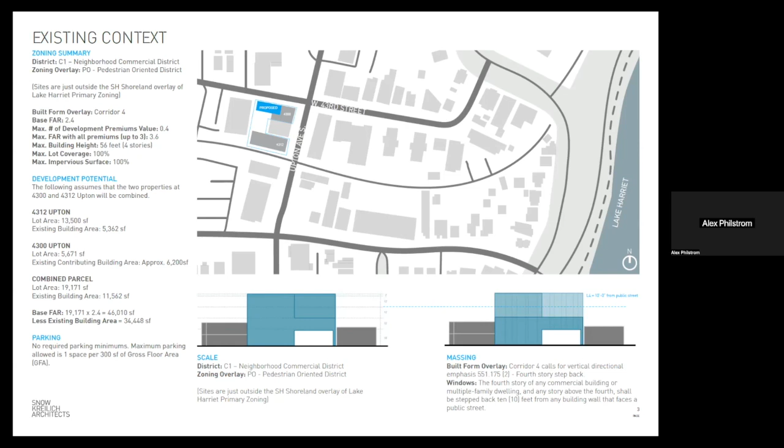Oh, absolutely, sure. Katie, do you have the image that shows the corner existing building and then the Zumbro section? Yes. Yeah. Here we go. Right there, that B photo is, I think, the easiest way to kind of look at that. If that could be enlarged in any way, Katie. But as a background, my name is John Gross, and I'm a developer, and I'm also in hospitality. I have co-founded many, many restaurants and own those buildings along with my business partner, Tony Johannes.

And we're both longtime residents of the neighborhood. Tony now lives in the North Loop, but he was born and raised in Linden Hills, and I've been in Linden Hills for 30 years. But in terms of anything significant, it's been the kind of adaptive reuse projects we've done in Linden Hills. So just as giving the context here,

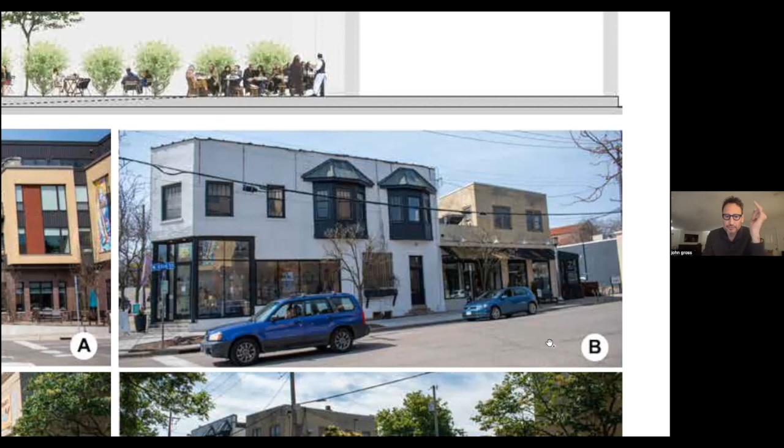slightly down the street, we took the old Bear Hardware, which was old. Everyone said tear it down. It was structurally insufficient, but we renovated that to make it first Upton 43, which we were partners in that restaurant, and then Martina. We then went on to do Colita, and then Rosalia, Cafe Ceres, all of which were in our own buildings that we renovated and I designed in conjunction on the interiors.

And then the businesses in there, we co-own those with our chef partner, Danny Del Prado, until last December, in which he bought us out. And so we all worked together well on that. This particular project was a tricky one because when we bought it, we knew there'd be some structural work, and we spent $350,000 just shoring up that front corner from underneath because the building was sagging from the weight of those billboards, but also this used to be a swamp.

And so, at that early stage, Tony and I discussed the project overall and said, we want to save as much of this old fabric as we can. And so what you see on this photo that is white is the part that was really kind of an insane amount of money, but just to kind of keep it, we wanted to do that and thought we could keep the Zumbro section, but we've gone through that very intensively, and that's that yellow section and then the little black screen porch. And it was built as a lean-to, just a one-story lean-to.

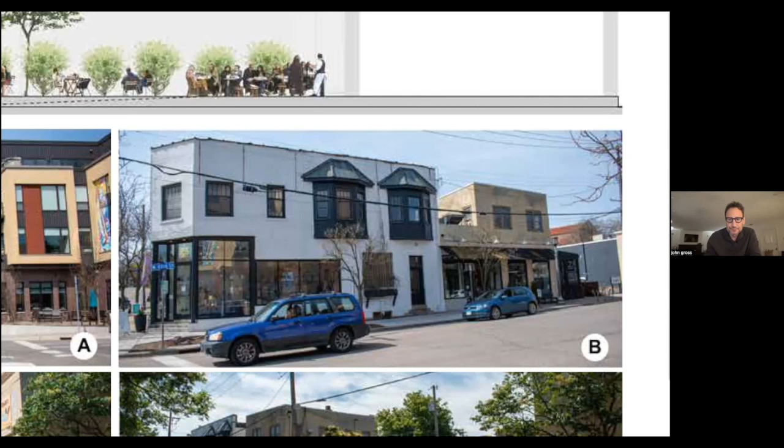Great. Thank you so much. Sure. Great. Yeah, that's a great introduction. Thank you, John. That sets the stage really well.

So I maybe don't need to go into the specifics of some of the zoning analysis. It's certainly something that I'm ready and willing to speak to as we go here, because I think it sets up how we've been thinking about the scale of the project on the site. But I'll just summarize this by saying that we understand we're in a neighborhood commercial district.

We want to be able to hold up what has historically been encouraged in this neighborhood, the small neighborhood-scale development, but still provide a space, a refurbished, reinvigorated space for Zumbro to come back, and then also be able to provide that new asset of a small-scale office space on the levels above that John mentioned. So being within that commercial district, that's something that we feel would be very valuable.

We also understand that we're within this pedestrian overlay district. And so that is guiding some of the other decisions that have been made on the project. From a zoning standpoint, you'll see that this primarily sets up where we step back the project, how we set up the scale, and how we really make the project feel appropriate to the pedestrian and to the street level experience.

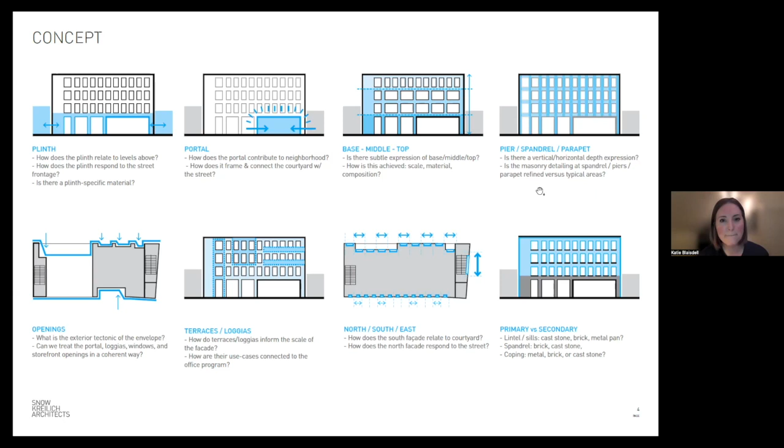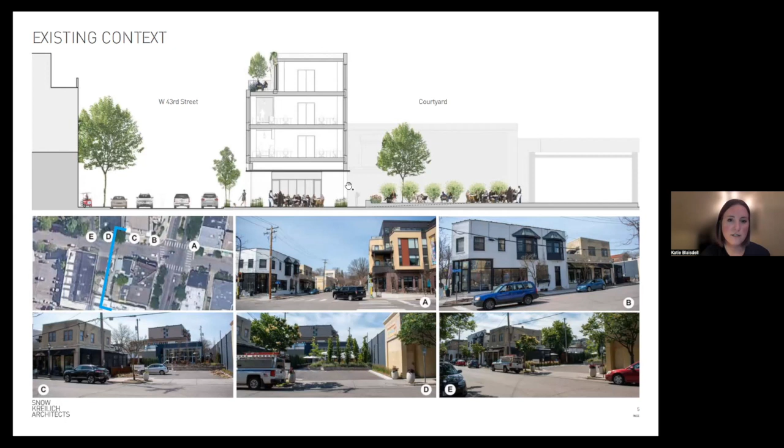And so the idea is that we have this continuity of pedestrian experience to go from sidewalk to covered terrace, through that portal being carved through the building, back to the Rosalia courtyard beyond, that you see in this middle bottom photo. I'll just jump back one. As I mentioned, that carve at the upper level is very intentional to draw back the building scale on the northern side on 43rd. And since this is a slightly taller building, it does help with the overall shadow cast.

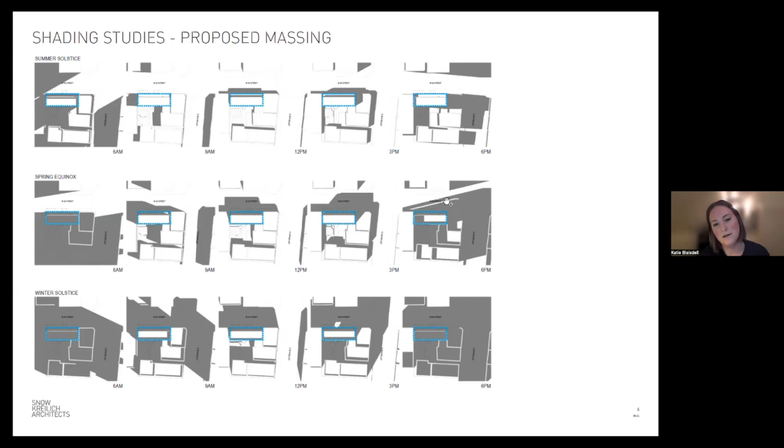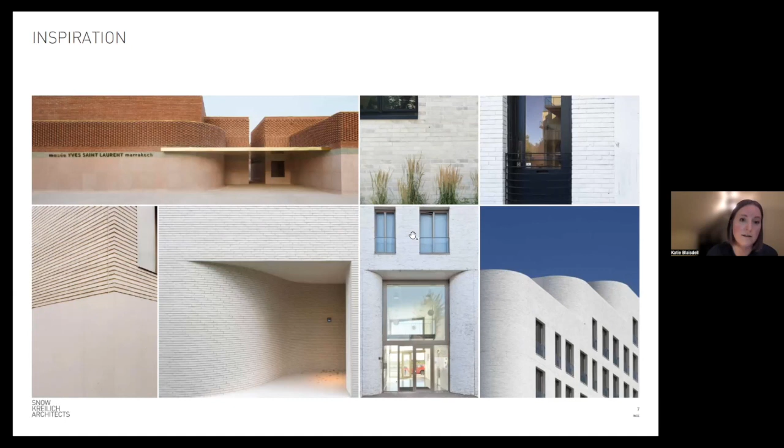For the primary material at the street though, we are interested in something that is relatively tactile and feels kind of earthen. And so this could be achieved in a couple of different ways and be a nice complement to that brick. We could look at a precast architectural concrete, which has a stain or a slight texture to it. The other way that we see that done is to use more of a stucco finish that would be cast in a similar tone to the brick that would be selected.

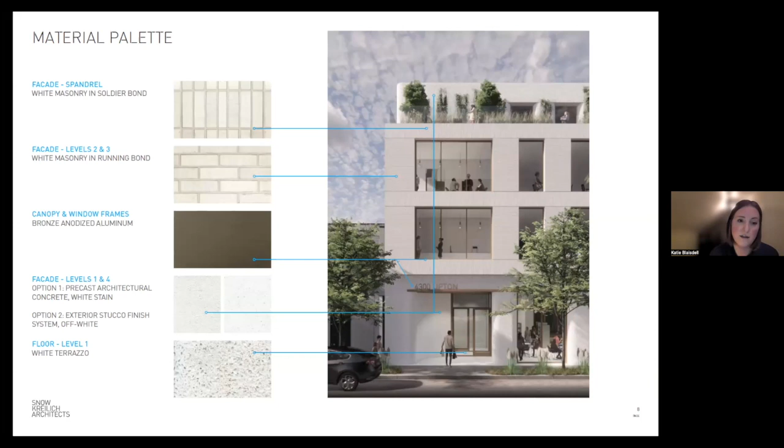And then I'll just jump back. The third material we're highlighting here is a bronze anodized aluminum, and that would be essentially any other detail for the project. So that would be window frames, door frames, and certainly the canopy above the primary entry and above the portal for the project. So you see that applied here in the overall rendering of this north side of the project. And I think that as a material, it has a softness to it as well, and something that can be a special material without being too overwhelming.

In this image, I think you can also get a nice view looking back through the portal to that Rosalia courtyard. And this is a rendered site plan to help describe that pedestrian experience. Again, kind of trying to draw in from the street and create one kind of flow of covered terrace, which would be the portal underneath the building here, and in the courtyard beyond.

This is the space that John is describing on level 1 that is essentially the footprint of the Zumbro Cafe today. This would be the space that would be turned over to cafe space or a restaurant in the future, with a kind of link between that space and the existing building to be able to bring in a new elevator and new stair, provide egress for that building and bring that building up to code.

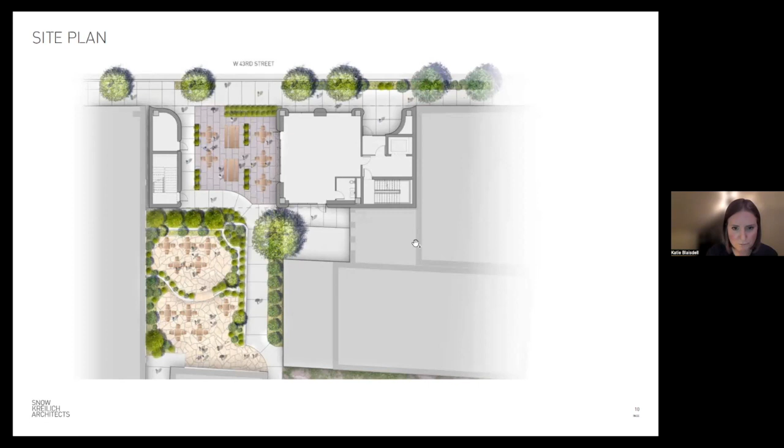So you see that in a little bit more detail in the first level plan. Again, a comparable size to the existing Zumbro at level 1, but that elevator located here. And I'll just jump through the plans above. We are right now in the stage of only working on the core and the shell of the building. So we won't get into the level of detail of delineating how many offices or how they would be occupied just yet. We have 3 stories of office above.

But I believe, John can speak to this as well, but I believe the idea is to be able to have small scale office tenants occupying this space so that we can provide an asset for the neighborhood that may not exist today. And again, at the top floor, seeing that terrace, utilizing that step back as a terrace on this floor for the tenant and being able to bring down the scale of the building at this floor.

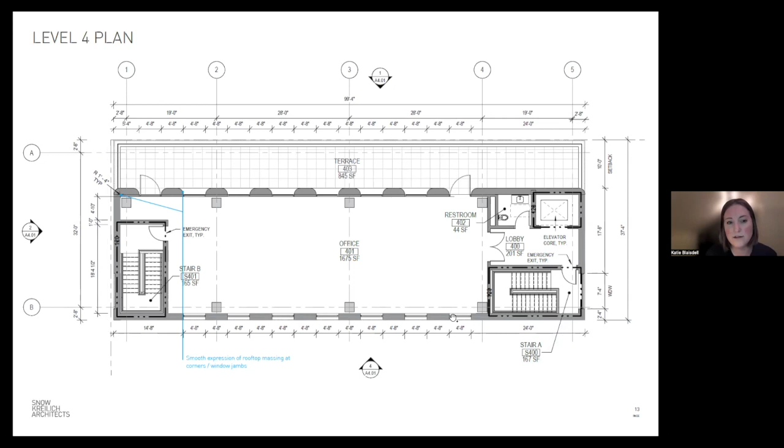We have some line work elevations just to help demonstrate the shade and shadow on the exterior of the building. And you see a little bit of that articulation of the facade where the windows and doors are stepped back at the upper floor and at the level 1. And a few additional views of the project here. So this would be looking back towards the intersection of 43rd and Upton. So looking east, slightly down 43rd.

This would be an elevation of the south, from the south. So from the Rosalia courtyard, what would you see? You, of course, would have access to that restaurant space at level 1, and then we would be providing plenty of natural light and air for the office space above. And you get a small peek of the eastern side of the project here, looking the other direction down 43rd. So we have kind of a play of some openings on this elevation as well to be able to bring some light and views into that stair core and some of the office space.

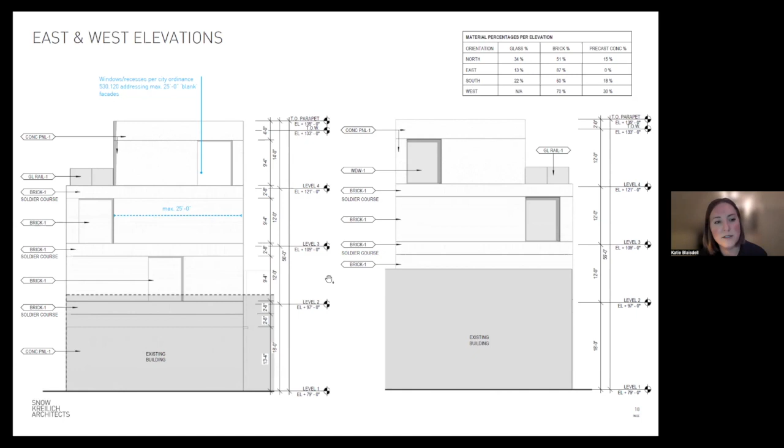And the other piece, on the elevation that faces the hardware store today, of course, because it is closer to the lot line, would not be permitted to have openings per se, but certainly we're playing with the articulation of the brick on that elevation to avoid having any blank facades and to meet the city ordinance that speaks directly to that. So I'll end here and maybe just pause on this image of the northern view one more time, just to be able to look at the overview of the project. And I can turn it over, John, to you if you had anything else you wanted to add.

No, Katie, thank you. That was beautiful work that you and the firm have done, and just a wonderful presentation. One thing, the entry into the elevator vestibule on the left and then kind of coming in from the right, those are both curved in, right? Yes, great. Incredible sort of intrigue and softness with that. And then the retail, which we call the retail, but it would be Zumbro's, would have their own door. They would not go in through where the one person is standing. That's kind of just for going up to the office.

So the Zumbro would have their own door in their facade, and then they would have doors that go out to that patio on the right. And the patio doesn't go all the way. There's still a nice, generous sidewalk that leads back to the Rosalia sidewalks. Right. All great points. But as you mentioned, the idea here is that you would be able to have some operability along the wall that's essentially behind where my cursor is here, so that there would be some flow of interior to exterior space, so that really this could be utilized as an extension of the Zumbro space.

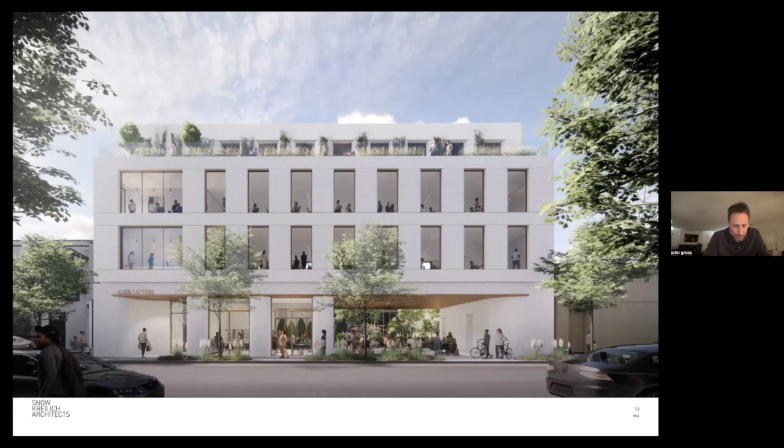It's something that's very important to us, and we will do our best, and it will get defined more as we go. And there's phenomenal programs out there to especially help small buildings, small businesses like us do a good job. So it's important to us. Thank you.

Thanks for that as well, Alex and John.

I would push much harder on that topic and that issue. Again, if this is the best that we can do, the embodied carbon of this building looks very intense on the offset, despite our best abilities to get carbon-free steel and carbon-free concrete and things of that nature. I think it can go a lot farther. So I guess I would point to other standards as well. And if this building were replicated infinite times, I think we'd be a few degrees off of where we want to be, despite how good it looks. So I would push harder on that.

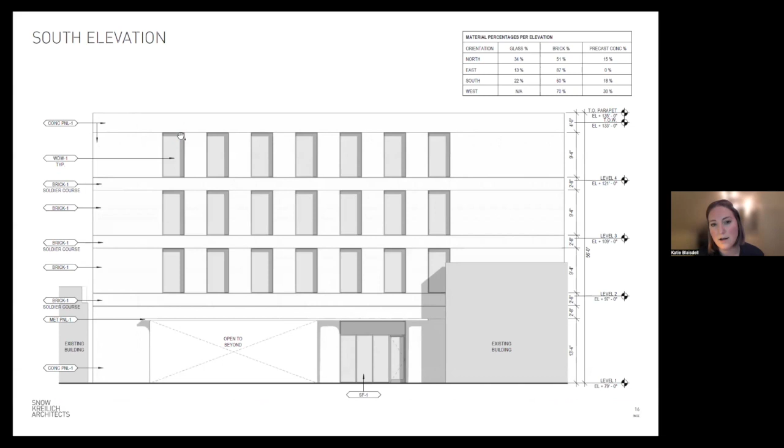I might have to jump back to the beginning of the presentation, but I think what that means is that at any stage of the land use application, we've been applying the principles of the project to all aspects of the combined parcel, to make sure that we're meeting all criteria on all buildings. So while some of the buildings, for instance 4300 or 4312, won't be touched as part of this project, they're included in all of our calculations to meet the site coverage, allowable density, that sort of thing. And so while the lot combination itself is really just an administrative approval, everything else has been factored in as we move through the land use application. Okay, great.

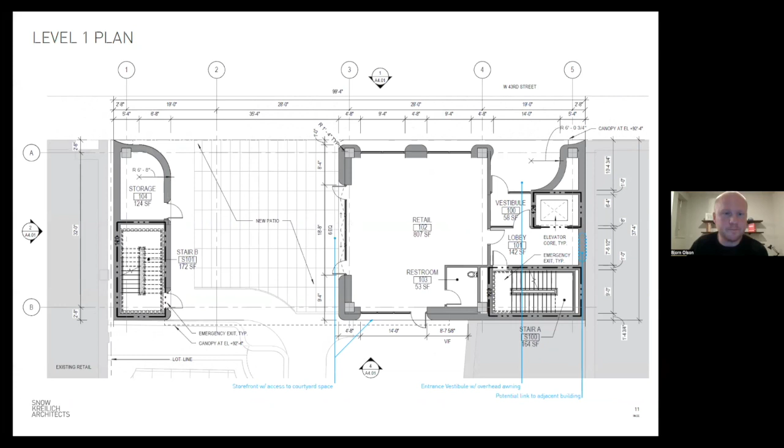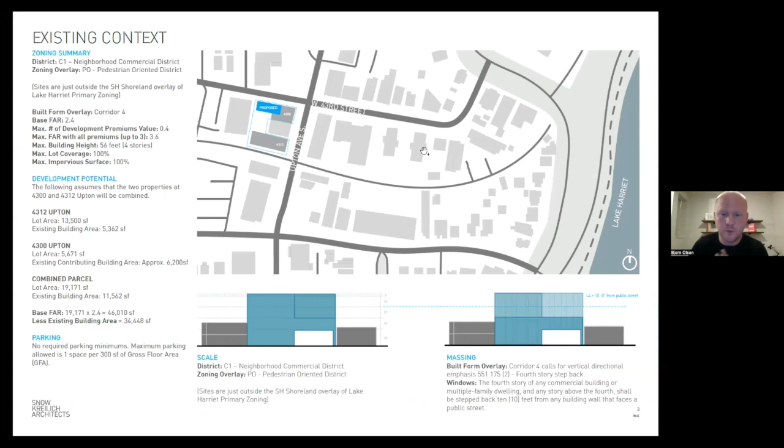I guess I could leave a moment for parting thoughts. If you all had your list of like 10 technical things to answer, save it for an email, but otherwise, I think the next step for the project, as I said, is Monday, December 5th, City Hall, room 317. You can contact Mei Ling. I guess that probably didn't get in the chat, but give me one second here. I can put some of that information in just so you all have it.

And thank you all very much for attending tonight. I think there's a few pieces of the conversation that need to keep moving, one being parking, and continuing to push the button on equity and sustainability in the neighborhood. I hope that we've created an opportunity for communication, opening that dialogue for what can create the best project for the neighborhood and for our planet, and also be conscious of everybody's abilities and rights and opportunities in that respect. So any other last comments or questions or thoughts?